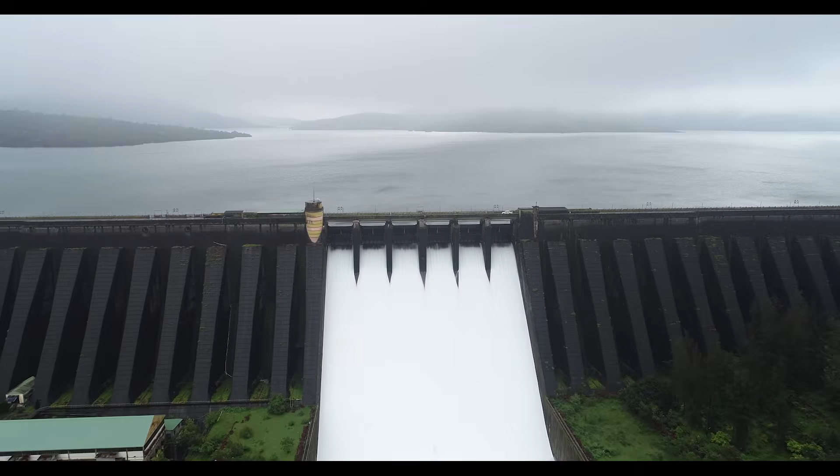The geographical character and features dominated by the Sahyadri ranges supported Chhatrapati Shivaji Maharaj in establishing Swarajya. In the midst of these Sahyadri ranges stands tall the Koyna Dam to fulfill its goal, keeping an example of the dominant character of the Sahyadri ranges.

Millions of years ago, the outpouring of hot lava gave birth to the sturdy, rigid and harsh mountain ranges of Sahyadri. These huge ranges also parent many rivers, mainly the 5 rivers Panchaganga, which originate at one place. The Panchaganga temple at Mahabaleshwar is the original source of the rivers Krishna, Savitri, Gayatri, Venna and Koyna.

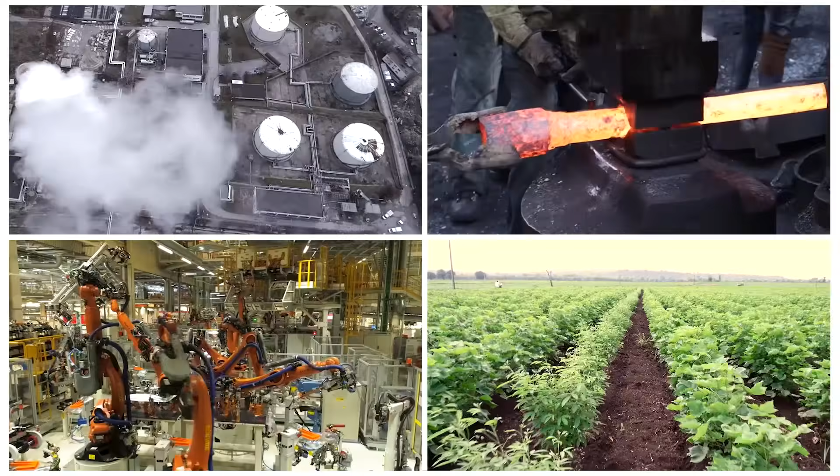The famous Koyna Dam and Koyna Hydroelectric Project is a man-built wonder on the Koyna River which flows through the Western Ghats. For more than 50 years, this man-built amazing structure has played an important role in the development and progress of every sector across the state.

Today, 1960 megawatts of electricity is generated through this project, which has emerged from the hard work and sacrifice of thousands of engineers. This project has also helped in the development of many industries and has illuminated many colonies. Also, many villages from the Sangli and Satara districts are receiving water supply for irrigation.

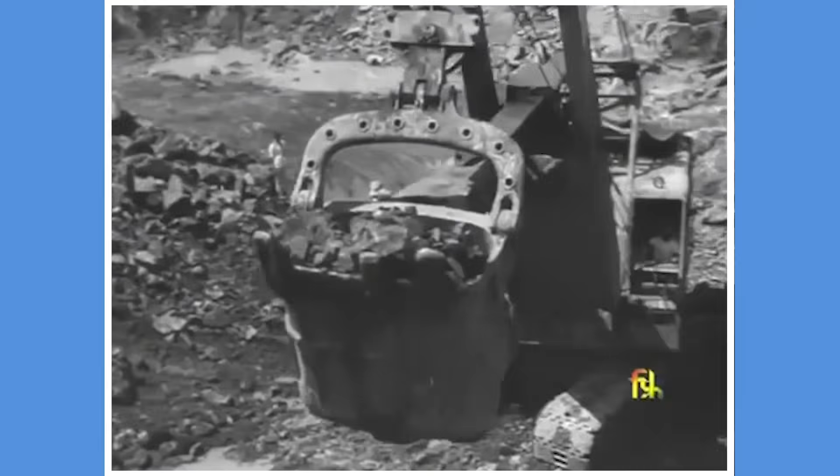But the journey behind the success story of the Koyna Hydroelectric Project was not smooth or easy. The year 1901-1902, the period was of British rule. Koyna River, which originates at Mahabaleshwar and flows through the terrain, was considered a concrete solution to the drought, since the rainfall in this region is 5,000 to 6,000 millimeters. 81% of the rainfall blends into the mainstream of the river. The entire valley is 2,000 to 3,000 feet deep.

Trampling on the difficult terrain of the Sahyadri ranges, the then British officer H.L. Bill, along with his colleagues, set out for the expedition which marked the first step towards the mammoth and unique task. After combing the region of Koyna and the Sahyadri ranges, an appropriate place was earmarked among the few villages for the dam. It was the Helwak village.

In 1909, a detailed report was submitted to the government of the then Mumbai province with an estimated cost of 81,92,000. Meanwhile, the industries in Mumbai were growing and so the demand for electricity too increased. In the meantime, Meares, an engineer, indicated the possibilities of hydropower generation on the Koyna River in the Hydroelectrical Possibilities in India survey. Meanwhile, some important developments took place.

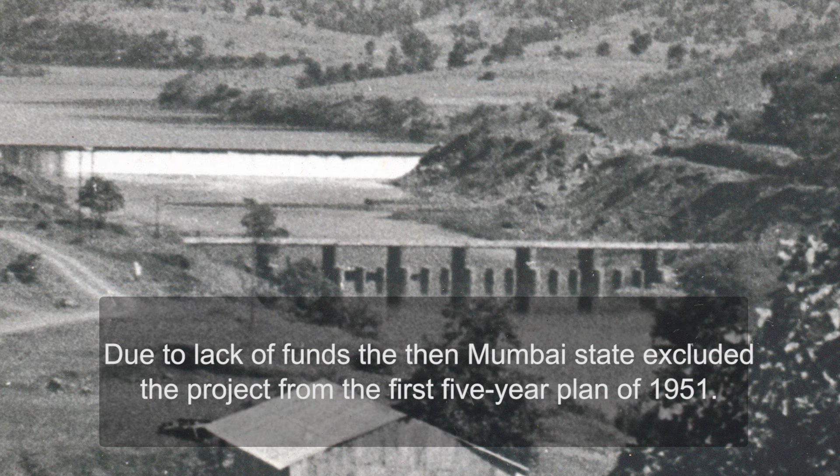The Deccan Manufacturers and Empire Association persistently followed and demanded the Koyna project. Due to lack of funds, the then Mumbai state excluded the project from the first 5-year plan of 1951. On March 16, 1952, the Deccan Manufacturers and Empire Association organized a conference at Helwak village. Along with Sant Gadge Maharaj, Bala Saheb Desai, C.D. Deshmukh, Karmavir Bhaurao Patil, Bhau Saheb Hire, Acharya Atre, Dr. Dhananjay Rao Gadgil and Kirloskar attended the conference.

Finally, on April 2, 1952, the delegation of the Helwak Conference travelled to Delhi for a meeting with Prime Minister Pandit Jawaharlal Nehru. The project was approved, and finally, on January 16, 1954, the then Chief Minister Morarji Desai inaugurated the project. After many surveys, meetings and reports, an appropriate Deshmukhwadi village site was earmarked for the dam.

But the project would also affect 30,300 villagers, including 101 villages, 3,755 houses and 77,500 acres of land. The government provided proper compensation to the affected and also helped them during the relocation and evacuation process. 101 villages were relocated into 5 districts.

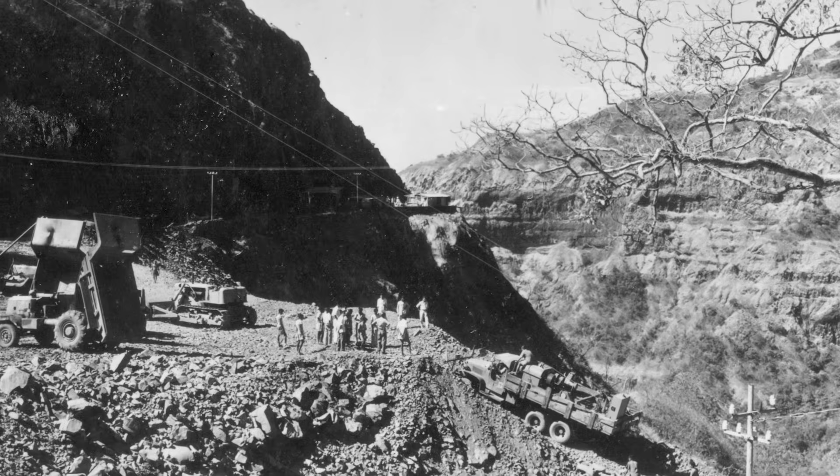According to the final report of the Planning Board, the Koyna project was planned to be carried out in 2 phases. In the first phase of construction, a target of storing 36.05 TMC water was planned at a height of 204 feet, while in the second phase, about 98.5 TMC water storage was planned by increasing the height up to 268 feet. M.L. Chafekar was appointed as chief engineer.

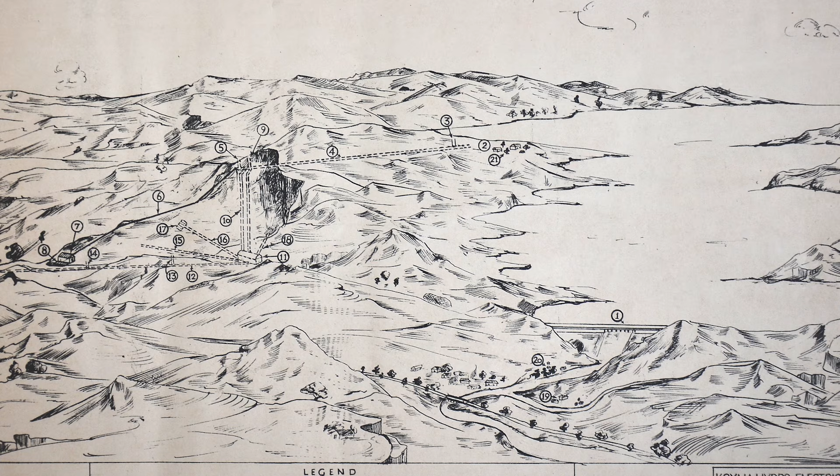Now the project was not just meant for irrigation, but the important task was also power generation. The engineers geared up. Dam and Design Circle and Tunnel and Design Circle were the 2 board offices created by Chafekar and team.

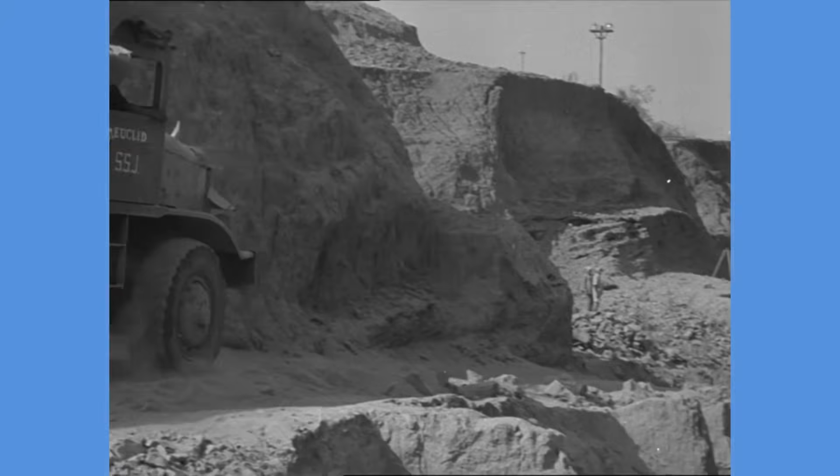The actual construction finally started on December 2, 1956. The workers and engineers immediately started working and were busy doing their jobs. Before monsoon, flow of the river was diverted by constructing a dam. The place of construction site too was dried up. The excavation was carried out on either sides of riverbed until they reached the hard rock.

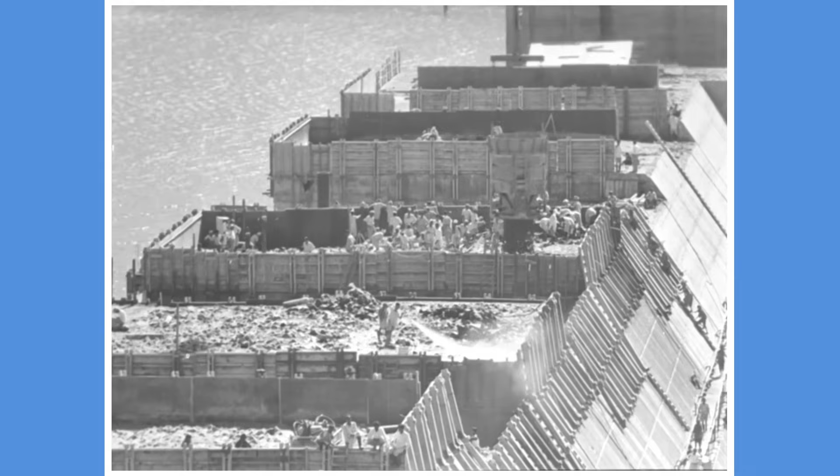The total construction of the Koyna's 53 monoliths were homogeneous type. The construction of 6 monoliths on both ends were in stone, while the rest were in rubble concrete. At that time, in Germany, 2 dams, Iker and Oker, were under construction in rubble concrete. Our engineers travelled to Germany to survey the dam.

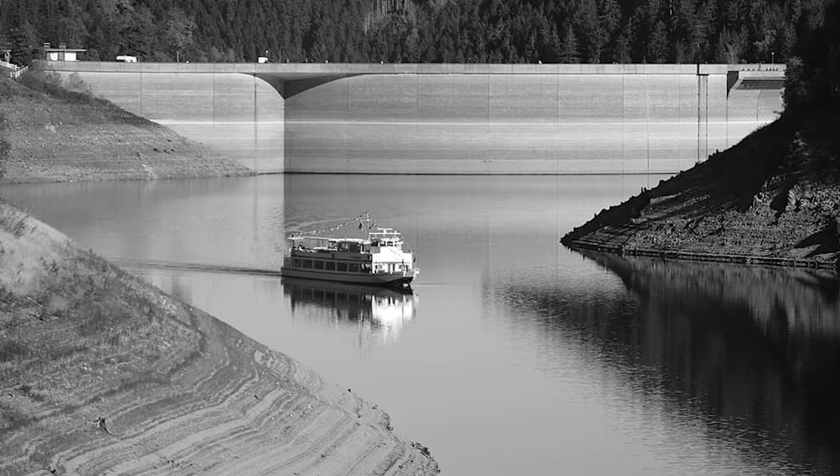Construction was progressing in a phased manner. The theme project that illuminated, brightened the state was actually taking shape due to the hard work of the engineers, thousands of workers, and support and sacrifice of the villagers. 2 long lane galleries were taking shape inside the walls of the dam. The construction of the dam begins in a planned manner. Nearly 900 feet long, 5 feet wide, and 7 feet in height, the gallery was taking shape.

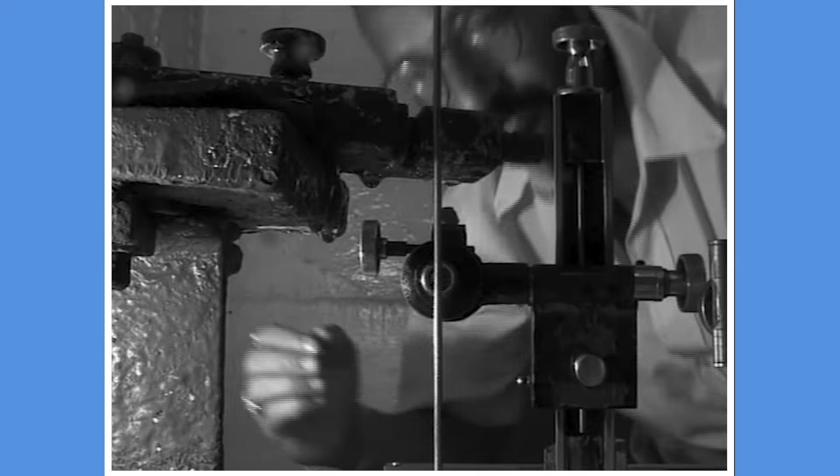Gallery is one of the most important parts. Measuring leakage, the pressure on the dam, checking the temperature of concrete are the important tasks done on a daily basis. The equipments like stress meter, thermometers, V-notch are kept in the gallery. A precise report and calculation of the water leakage from the dam is done on a daily basis in this gallery.

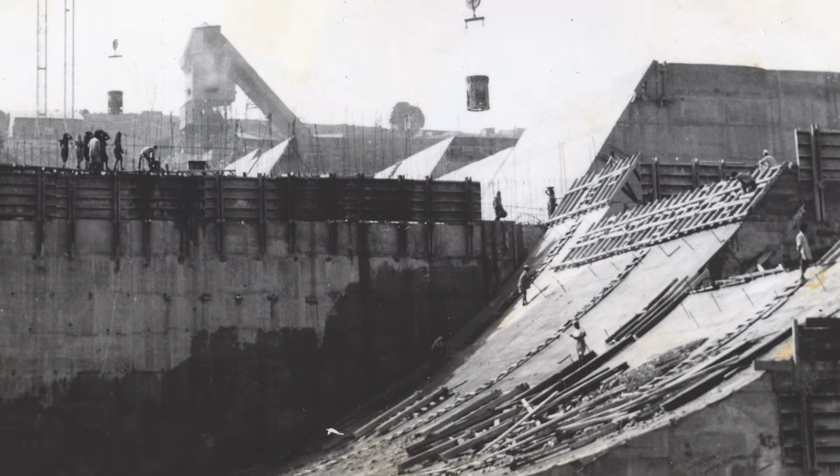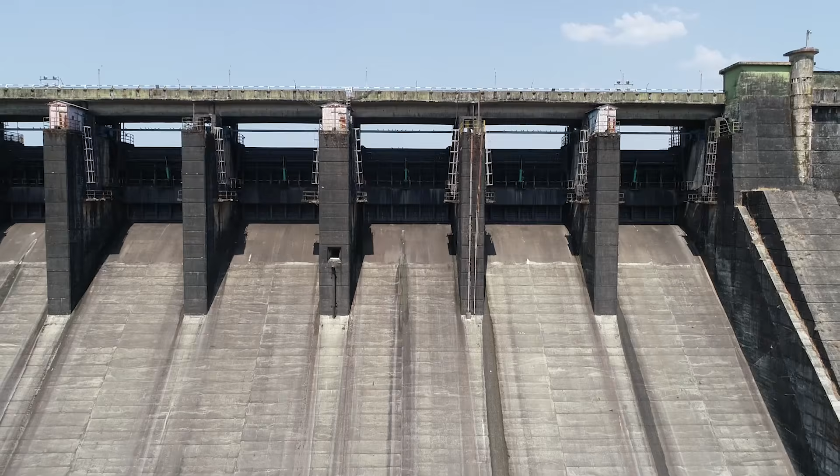On June 29, 1962, the first 2 phases of Koyna Dam were combined. Finally, by 1964, the construction of the dam was completed. The mechanical division of Koyna built the curved doors. While constructing the Koyna Dam, 2 penstock were made on the right side of the wall for future power stations. Further, in 1975, 2 generators of 20 megawatt capacity were installed there.

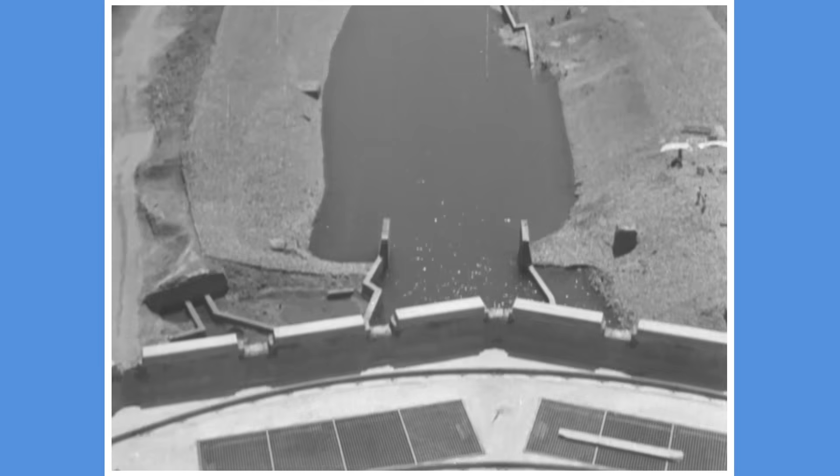While the dam was under construction, work on power station had started in Pophali village, situated directly on the steep slopes of Sahyadri, 9 kilometers on the western side of the dam near to the village known as Navaja. For same, an intake tower was being manufactured at Navaja. Use of the steep slope from Navaja to Pophali was going to be utilized for rotating the turbine and generating power, for which a tunnel of 3,700 meters was being dug. Ideal use of high Sahyadri ranges.

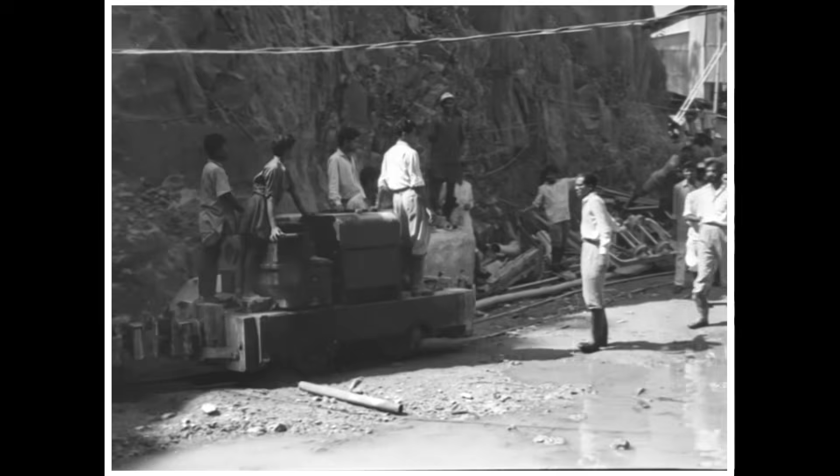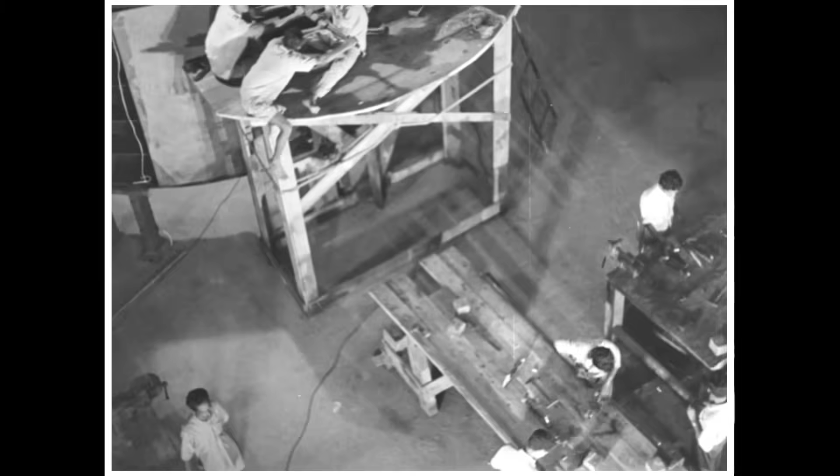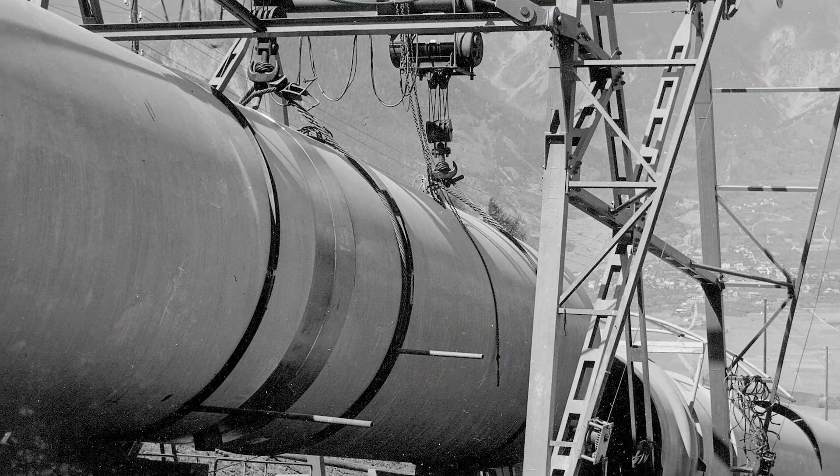Preparation for underground power station of Pophali was in full swing. Here, of 8 turbines, 4 on each side were being installed. This is known as Koyna Phase 1 and 2. A large tunnel was built to enter the underground power station, which was known as Approach Tunnel. Instead of penstock, the less expensive header tunnels were chosen for the underground channels in Koyna area. At that time, due to underground pressure shafts, Rs 1.80 crore were saved.

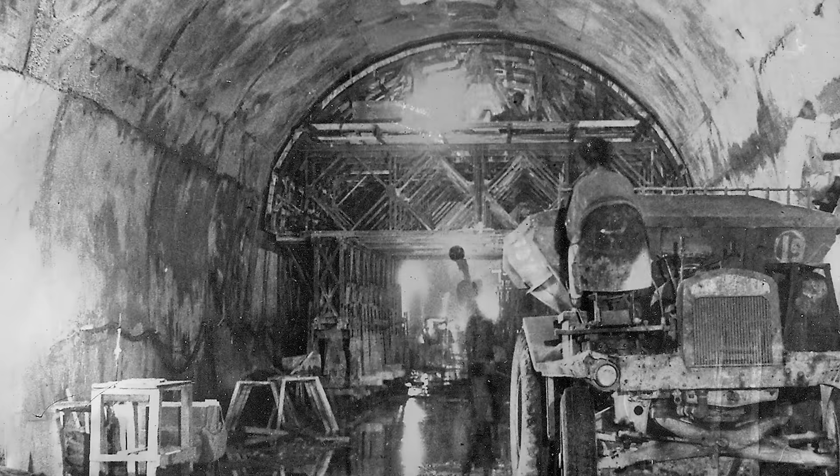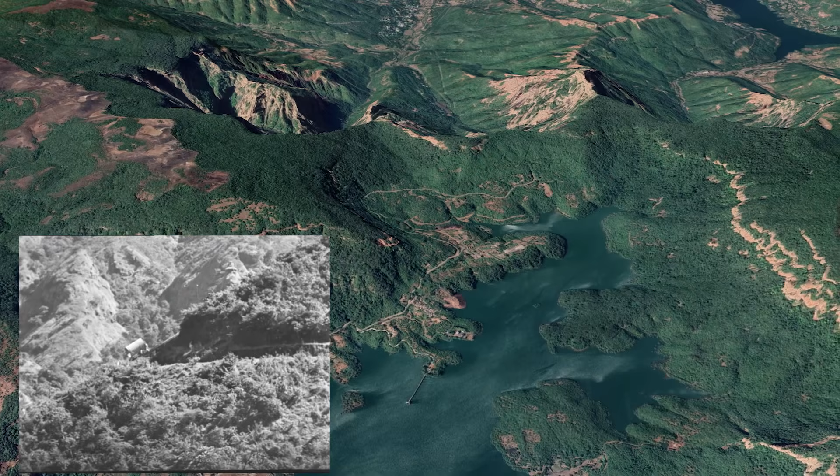The length of the head race tunnel was 3.748 kilometers and the diameter was 21 feet. The tunnel work was started from 2 places at the same time, one from the side of Navaja's intake channel and other from audit side. Head race tunnel was the only tunnel which was dug from both the ends at the same time. There was a small difference of 4 inches when 2 sides came together. A surge well was designed for the bouncing water when the turbine was shut or on. The work was carried out in difficult mountain ranges and in very remote area.

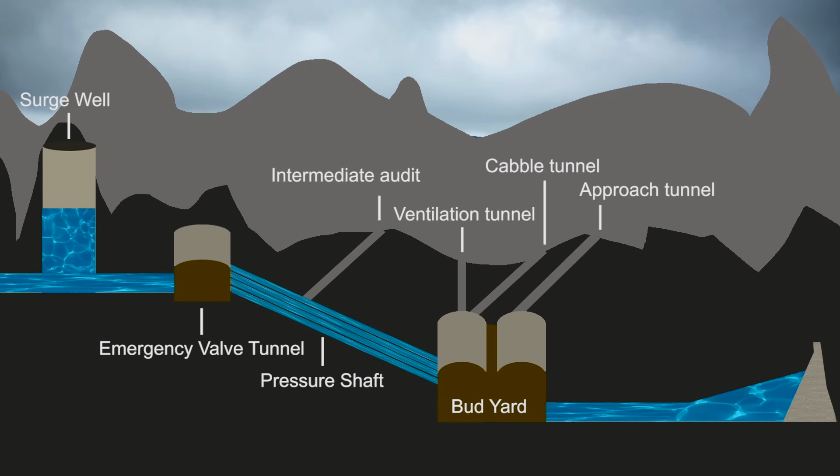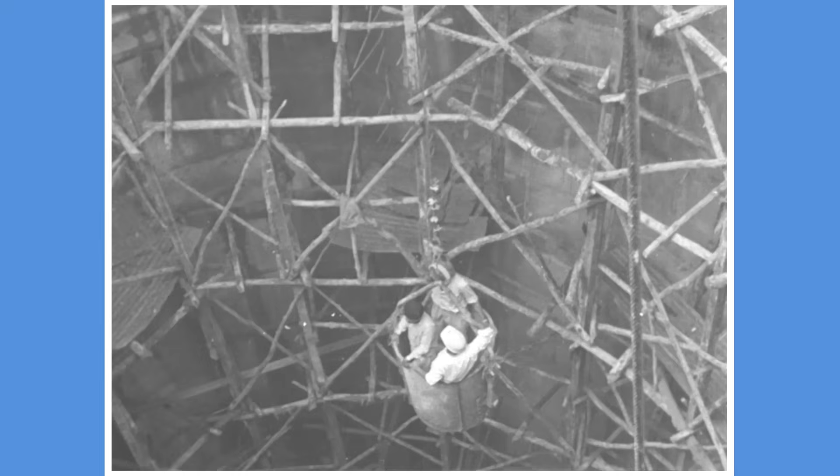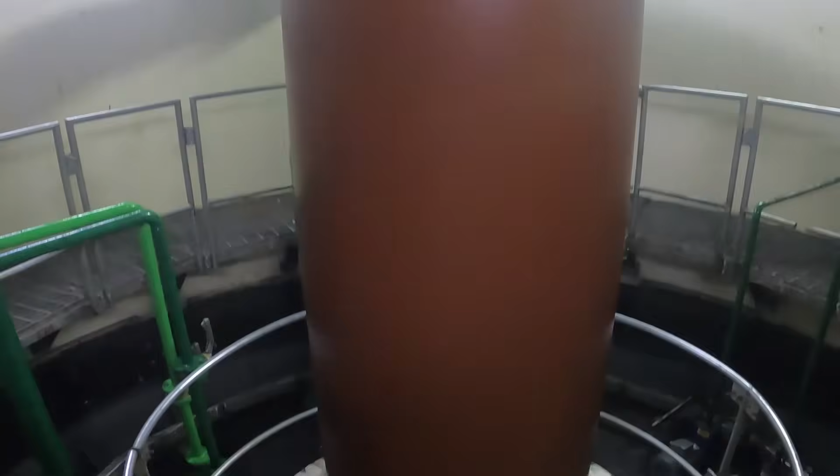A 10 feet diameter pressure shaft at a 45-degree angle and of 2,000 feet passes through a 12 feet diameter tunnel. From inside, steel pipes are attached to the pressure shaft. The engineers and workers worked day and night smashing the hard rock of Sahyadri. The most important place after this is the power station. One can experience the scientific invention in here.

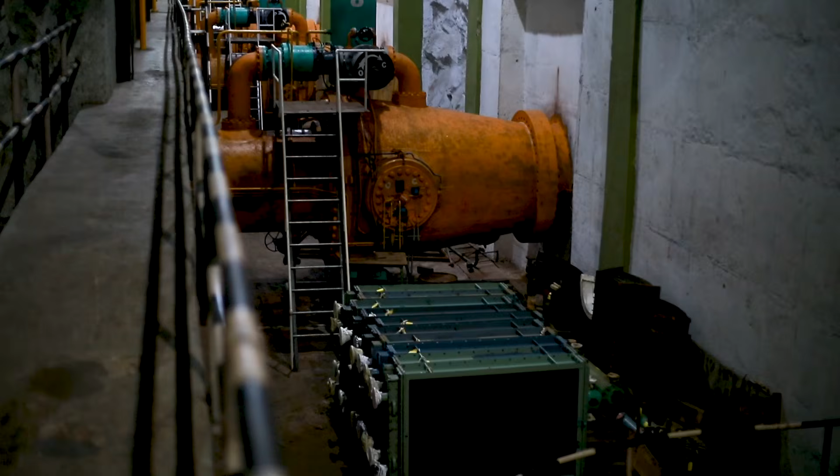Due to force of water, the fast revolving turbine for power generation; a water controlling spherical valve is here. How is electricity generated? Fast falling water speeds up the revolving motion of turbine blades. Turbine is connected to generator with the help of shaft.

Rotors attached to shafts have magnetic plates with electric currents. Structure of these plates is north-south. Sets of copper wires around the rotor. While moving in the middle of the stator, the poles of the rotor, which create magnetic field, impact the electrons in the copper wire of the stator to produce electricity.

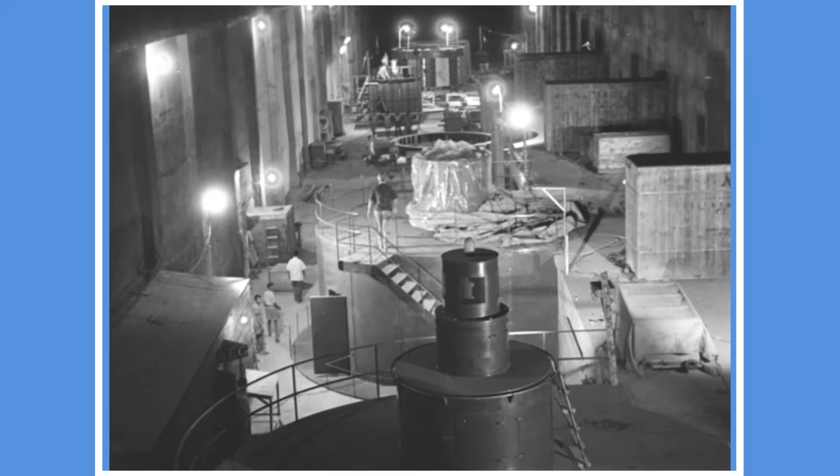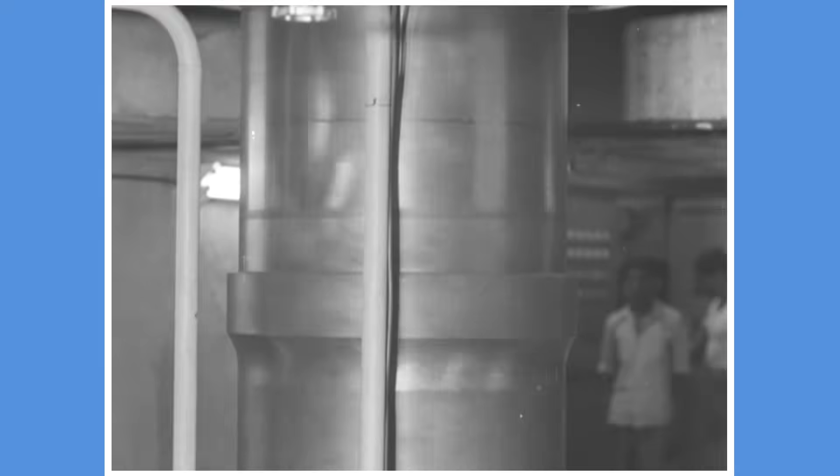A unique project was on the move to success with ingenuity, experimentation, and discovery of humans. Prime Minister Pandit Jawaharlal Nehru visited on April 10, 1960. On May 16, 1962, the first generator of Koyna was implemented by Honorable Chief Minister Yashwantrao Chavan. With both phases 1 and 2, total 560 megawatt of power was generated. With the help of Sahyadri and Koyna, the engineers' hard work took the first step towards illuminating the state.

With the ongoing project work, rehabilitation of the villagers was underway, as well as a colony for the project employees built at Koyna Nagar. While the state was getting illuminated due to Koyna project, the day of natural disaster appeared. In the early hours of December 11, 1967, a devastating earthquake of 6.7 Richter scale triggered at Koyna Nagar. The earthquake was so severe that the tremors were felt in North Indian and Southern Indian states as well.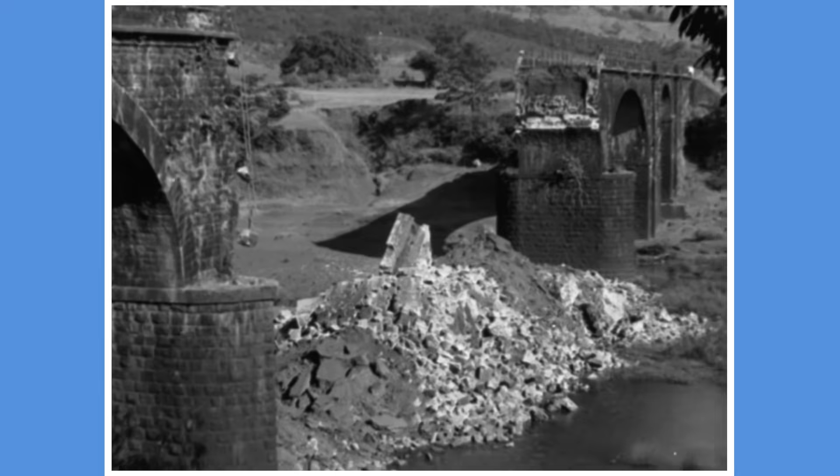More than 200 people died and more than 2,000 were injured in Koyna Nagar and the adjacent areas. About 10,000 houses in 40 villages were destroyed. The bridges like Helwak collapsed. The damage was innumerable. After the earthquake, the dam was still standing firmly, but the dam walls were horizontally cracked at isolated places.

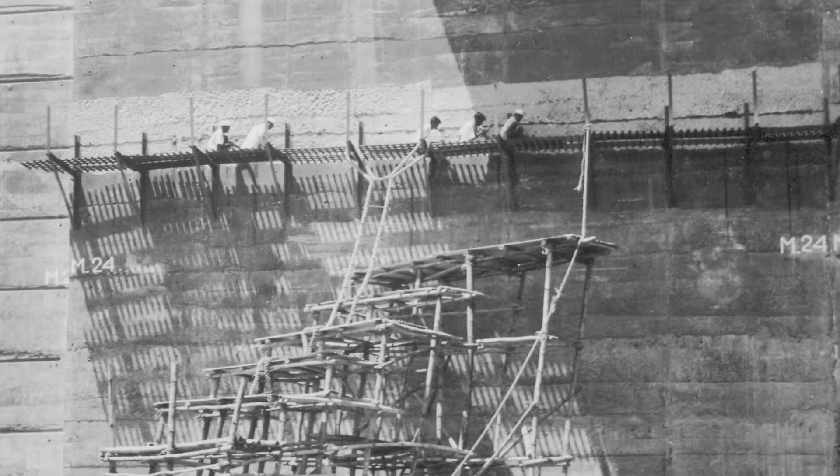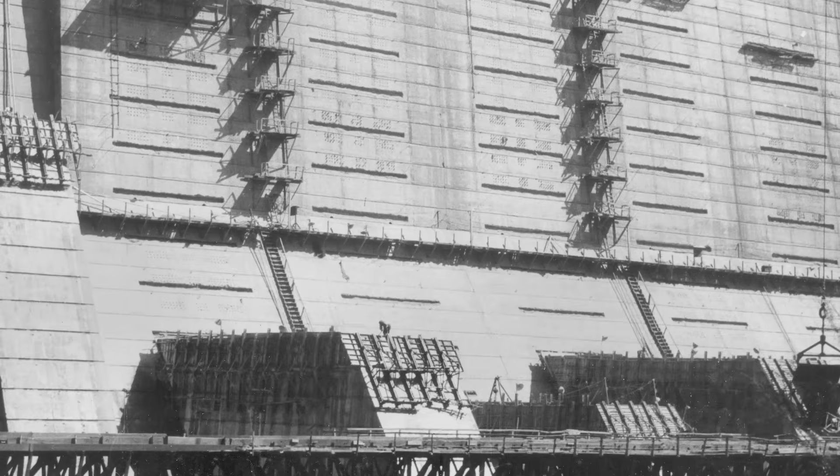The central government and UNESCO sent a team of experts to suggest immediate and permanent strengthening measures. Under the immediate solution, the cracks were repaired with epoxy resin and polyester, and grouting was done on both the sides. Under the permanent strengthening measures, it was decided to create a buttress design on the dam to strengthen it after the earthquake. Closure concrete was used to integrate old and new construction.

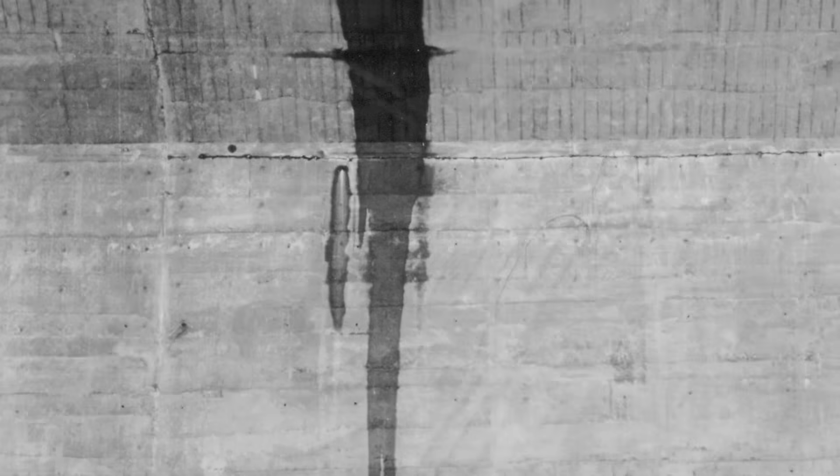At the same time, the number of cracks was found to be high at the site where the upper part of the dam was modified while completing 2 phases of the dam in a row. Therefore, the top and bottom were connected with the help of cable. Holes were drilled from the top, cables were inserted and concrete was filled. It was said that it looked as if the engineers had stitched the dam. Due to the repairs and strengthening, Koyna Dam has become a strong dam. Every year, the dam is a boon for sustainable irrigation and power generation.

In March 1966, all the 8 machines of Phase 1 and 2 were operationalized and handed over to the Electricity Board. However, the water released from the Pophali site after power generation into Vashishti River is 133.20 meters above sea level, a golden opportunity to use the water again for power generation. That is why it was planned to dig a 4.5-kilometer tunnel to stream the water released from Pophali into the basin of Vaitarani River, construct Kolkewadi Dam to store it, and build a power station at Alore to generate electricity.

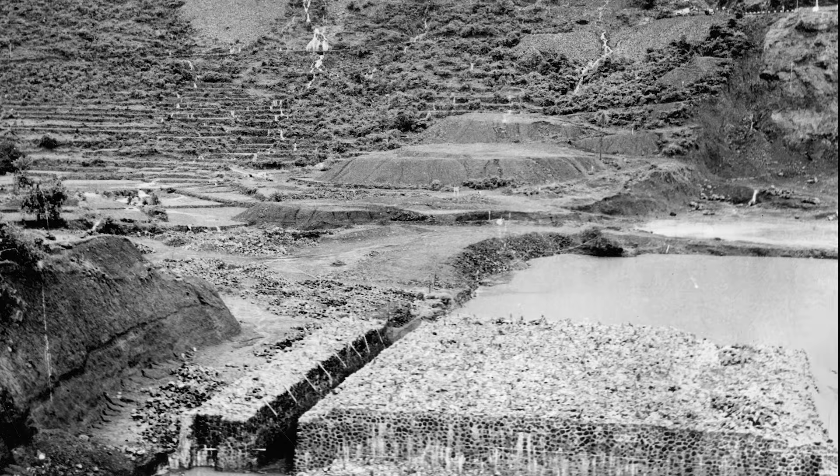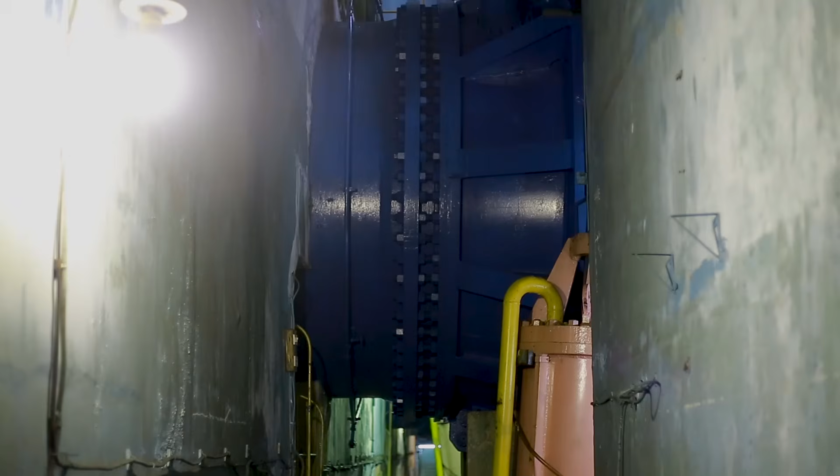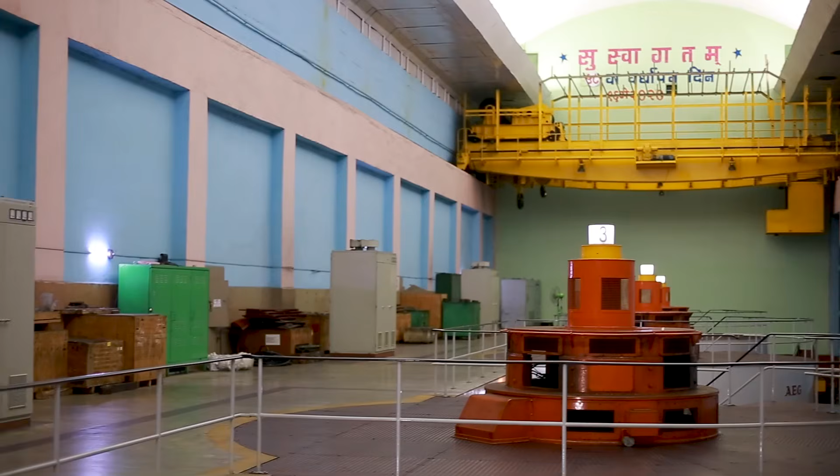The fourth phase of the planning was to make adequate use of water in the reservoir and convert the entire Koyna hydropower project from base loading station to peaking station, even though electricity was being generated from Phase 1, 2 and 3. Near Navja, where there was an intake tower of Phase 1 and 2, a plan was proposed to construct an underground power station of 1000 megawatt capacity from the water which directly flows to Alore through another tunnel. In 1985-86, a World Bank team visited the project site for the survey and checked the loan report submitted, while in 1989 it sanctioned a loan of 40 crore US dollars for this project.

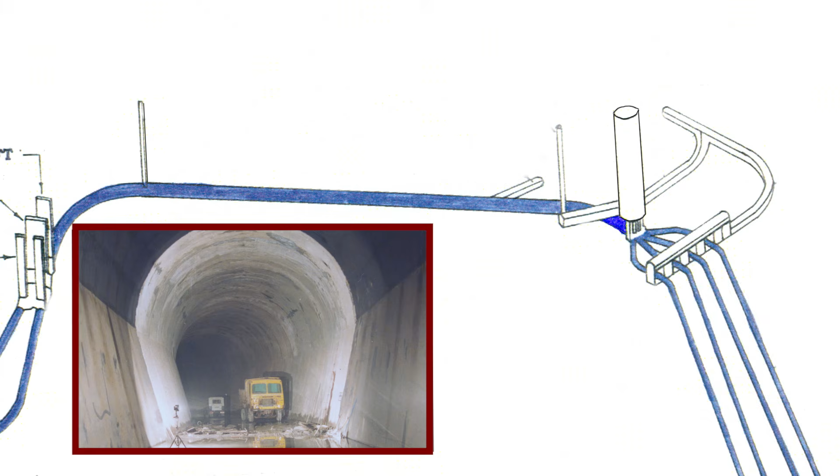Building the intake in the fourth phase was a challenge as there was water stock in the dam. For this, it was decided to use the technique of lake tapping, which was frequently used in Norway, with the help of their experts. A lot of work was to be done before lake tapping. It was not an easy task to be done on the huge and hard rocks of Sahyadri ranges. The head race tunnel, surge well, emergency valve tunnel, and pressure shaft were very complex. Work from Navja to the surge well and from the surge well to Alore's underground power station tunnel had begun.

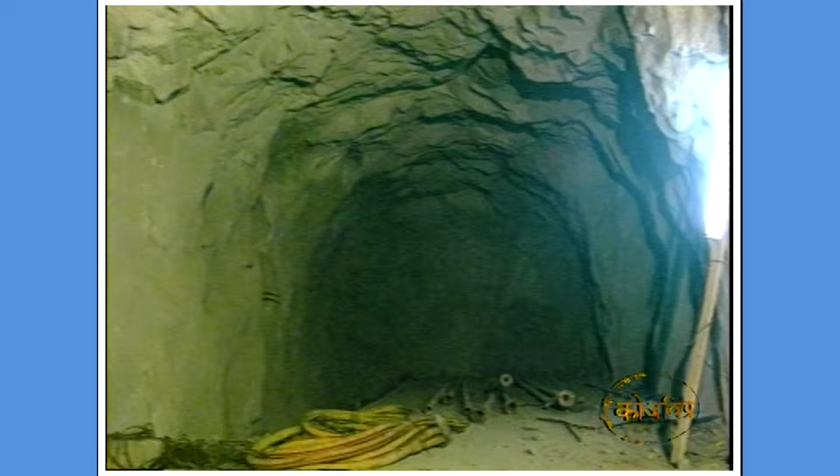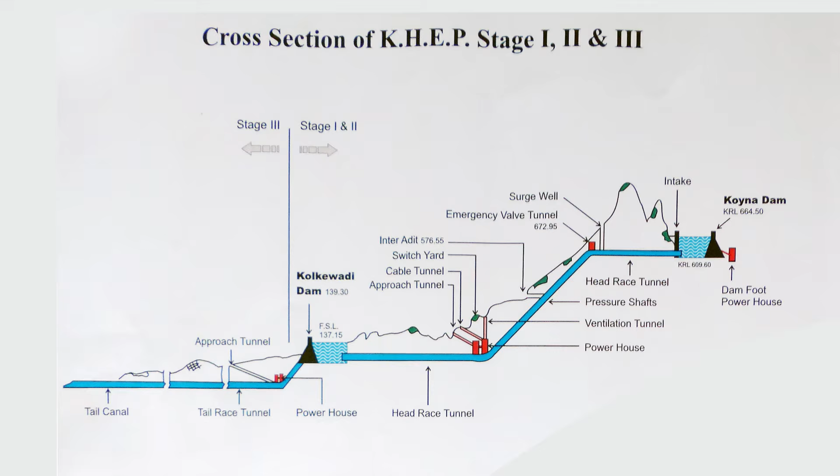The aim was to install 4 generators of 250 megawatt capacity. Although the fourth stage on paper was similar to the second stage, in reality there were endless difficulties. Surveying these hard and harsh mountains of Sahyadri was a challenge. Occasionally, the workers completed the work by tying ropes. Blasting was done by piercing cavities and filling them with explosives. Several safety measures were taken care of.

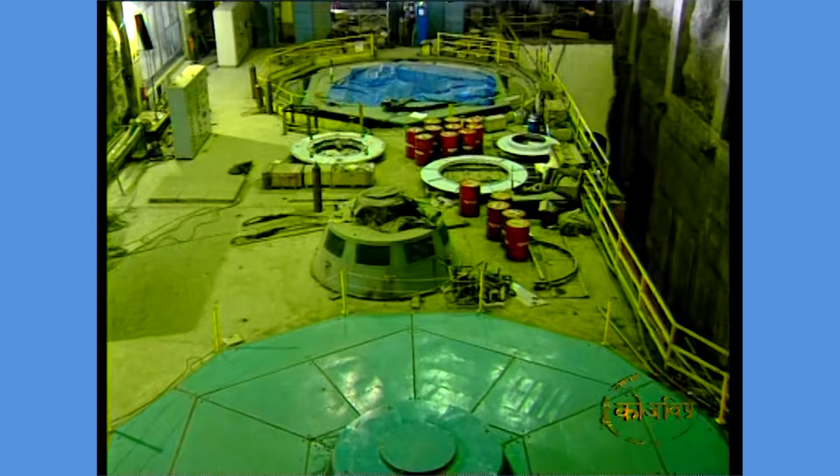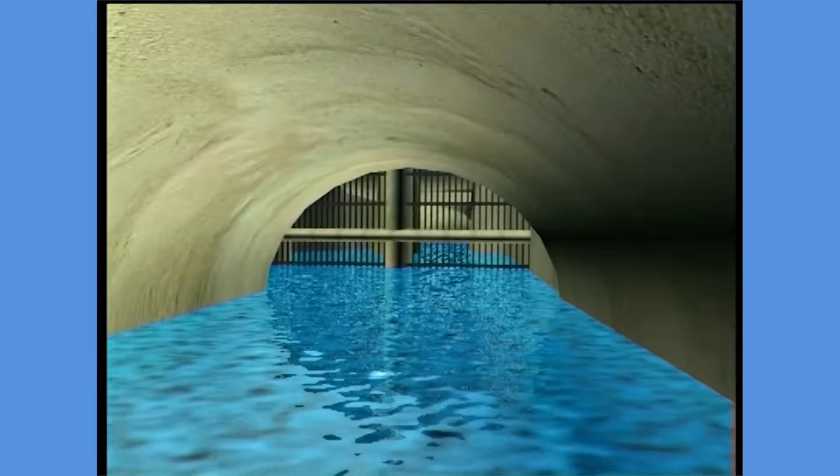As in the third phase, a Francis turbine was also used in the fourth phase. Key factors and aspects of phase 4: 4 machines manufacturing 250 megawatt. HRT from the site of lake tapping to intake tunnel. Cement concrete lining of tunnel. Length of head race tunnel 4.22 kilometers.

Diameter of surge well 69 feet while height 430 meters. Design of pressure shaft at 58-degree angle on the ground. 4 pressure shafts of 590 meters. Work starts in full swing in the turbine hall. Thousands of labor and engineers were working day and night to install various machinery.

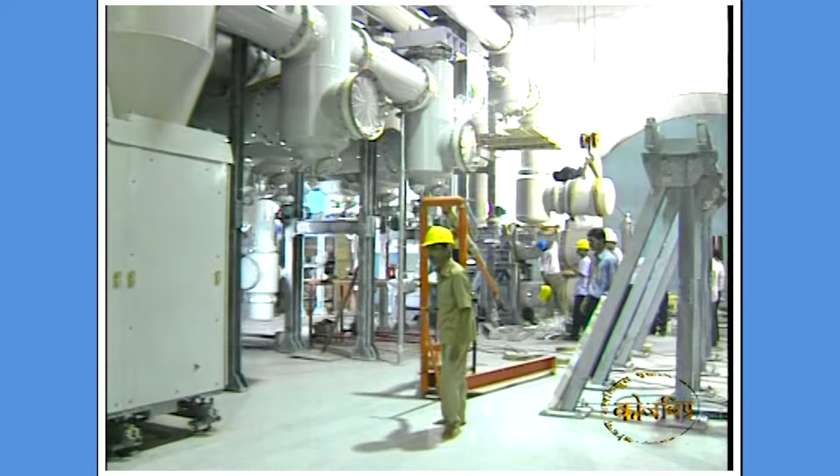In the fourth phase, there was no space to build a switchyard. So the country's first gas-insulated switchyard was erected by using modern technology of SF6 gas in the transformer hall of the power station. If the switchyard was installed outside, many acres of land would have gone under the yard. But the new technology switchyard solved many problems.

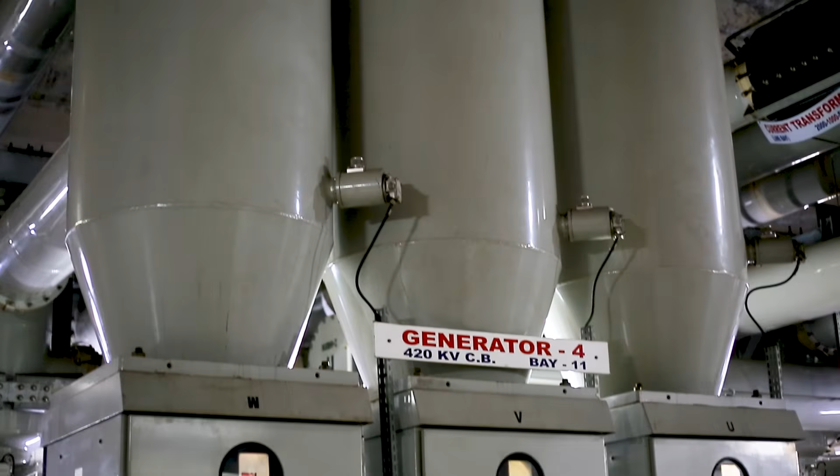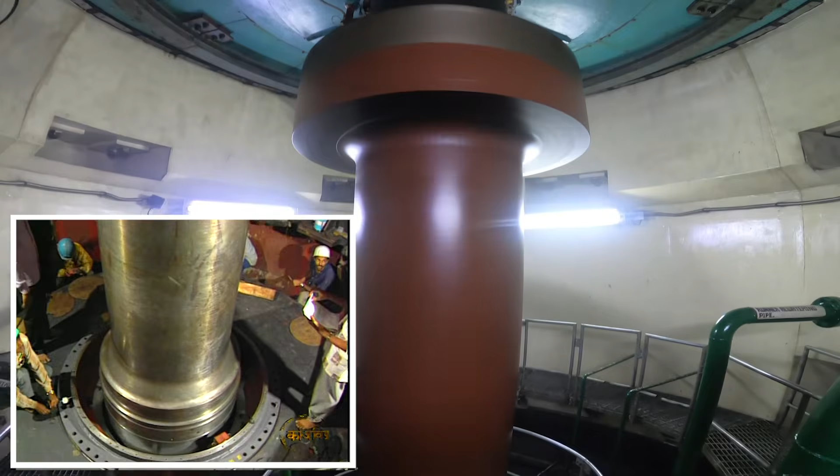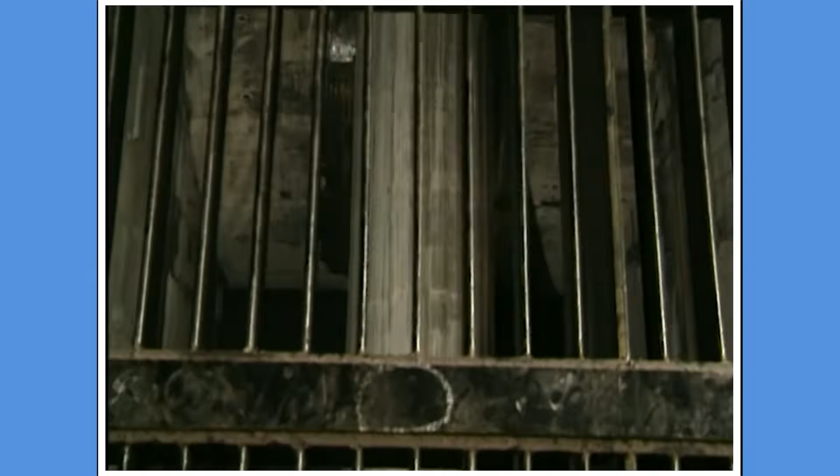The work of the power station with 2 intake tunnels was almost complete. This amazing project was taking shape with major components like the main power station. Now the preparation for lake tapping was in the final stages. The work on the tunnel under Lake Tap, the intake tunnel, was completed in 1997. Now to break the 6-meter rock, the tunnel below the reservoir was filled with explosives by piercing holes.

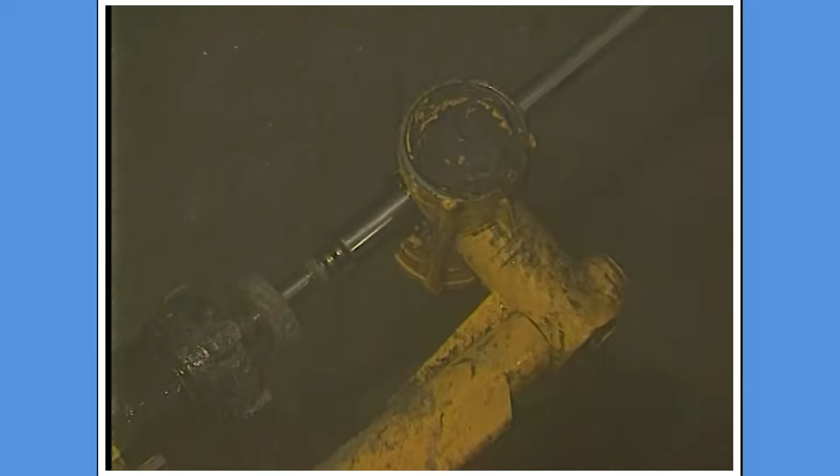Experts from Norway were deliberately called in. The possibility of some unexpected events while drilling holes in a rock under tremendous water pressure could not be ruled out, but it was a test of the engineers' courage, study, and decision taken after hard work and research.

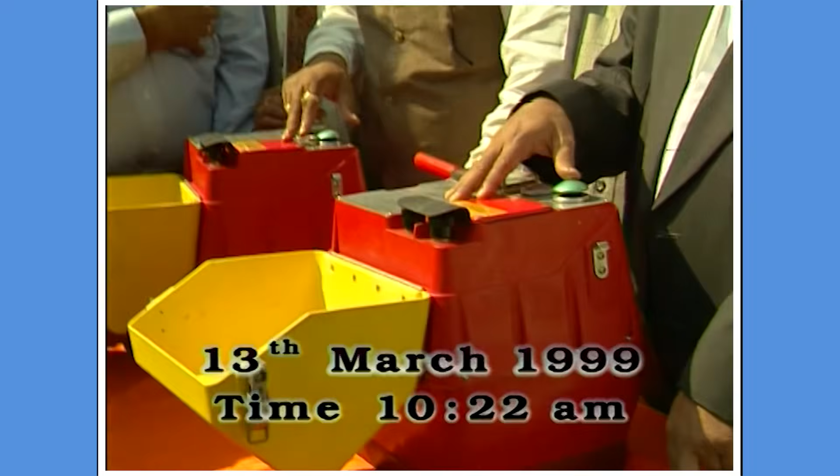Finally, on March 13, 1999, in the presence of the then Chief Minister Narayan Rane and Deputy Chief Minister Gopinath Munde, Asia's first lake tapping was successfully carried out. As the key was pressed, the world saw the gushing water flow. The atmosphere was filled with joy, pride, and happiness. Each and every person present had a smile of pride. The engineers, countless workers and laborers were satisfied and proud of their hard work. Today, 1,000 megawatt of power is being generated from the 4th phase.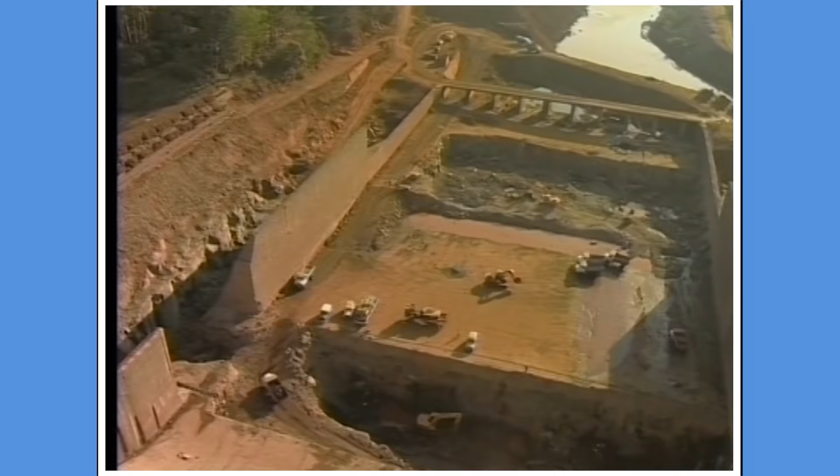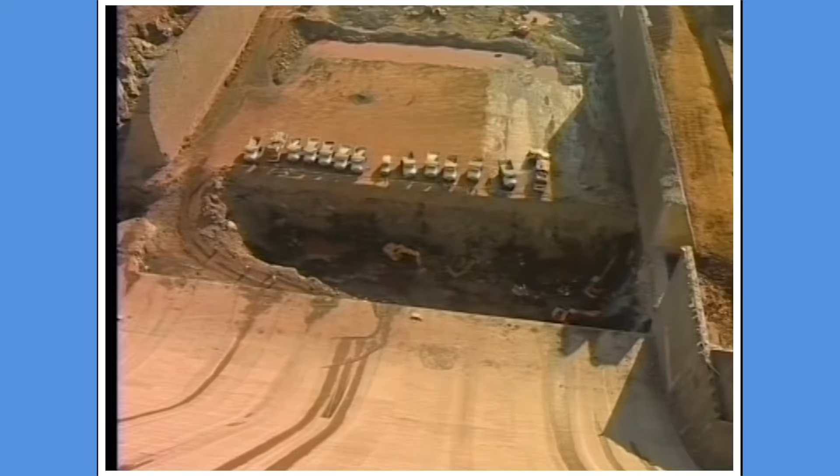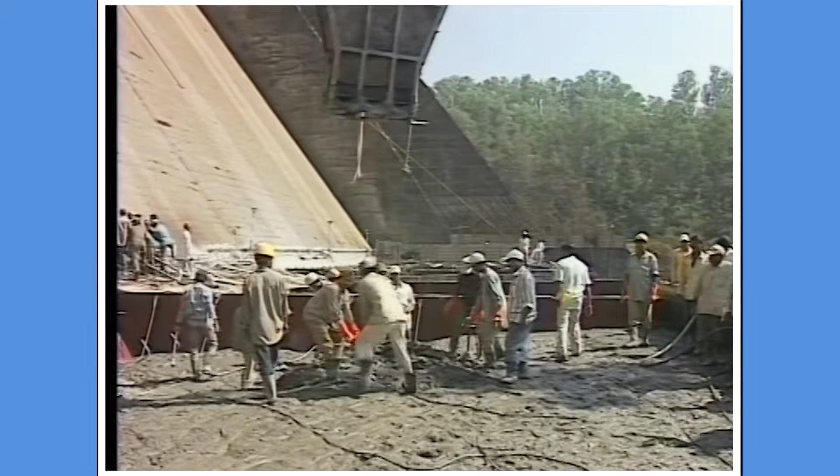In the first phase of strengthening, the foundation of the sewer was to be dug 25 meters wide, 25 meters deep, and 82 meters long. The rock was to be broken without endangering the construction of the dam. The rock was smashed by very controlled explosions. The length of the stilling basin was increased by 52 meters to 115 meters. During this process, to control the temperature of the concrete, actual ice was used, for which an ice factory was set up at the site.

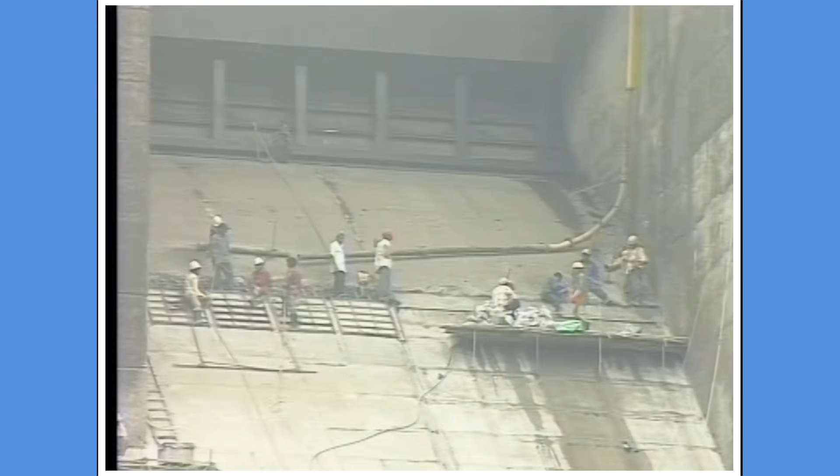It was a threat to life while working on the strengthening of the sewers in the second phase. The work was completed in a very dangerous situation. The difficult task was done in a phased manner by constructing a temporary raft. To strengthen the concrete, as well as to integrate the old and new concrete work of the sewers, it was filled up with closure concrete. Soon after the work was completed in May 2006, during the rainy season the dam was full, and the water released at a speed of 1 lakh cusecs acknowledged strong and quality work.

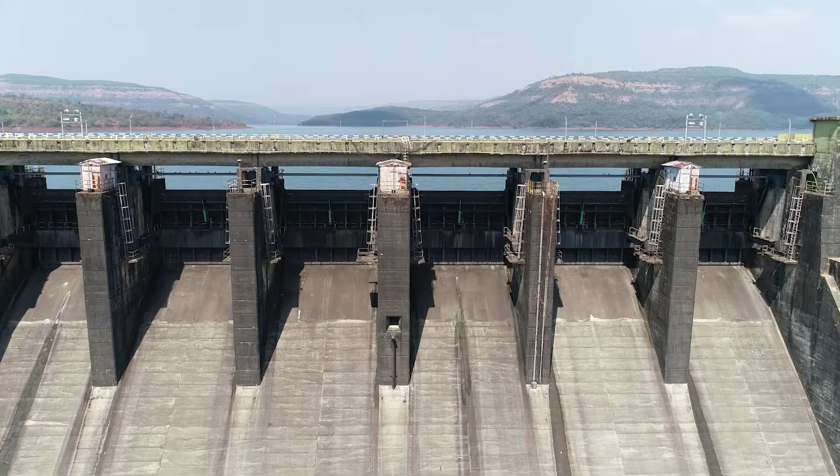Why was the fourth phase expansion necessary? Krishna Valley Development Board was established in 1995 for Krishna River water distribution, to increase the area of irrigation by using available water immediately. For new irrigation schemes, 50 TMC instead of 30 TMC water from the Koyna was provided to the drought areas where schemes were launched by Krishna Valley Corporation in Mhaisal and Tembhu. Accordingly, 5-feet valve or flap gates were installed at the dam gates. 105 TMC instead of 98 TMC water was stored after the strengthening in 2006.

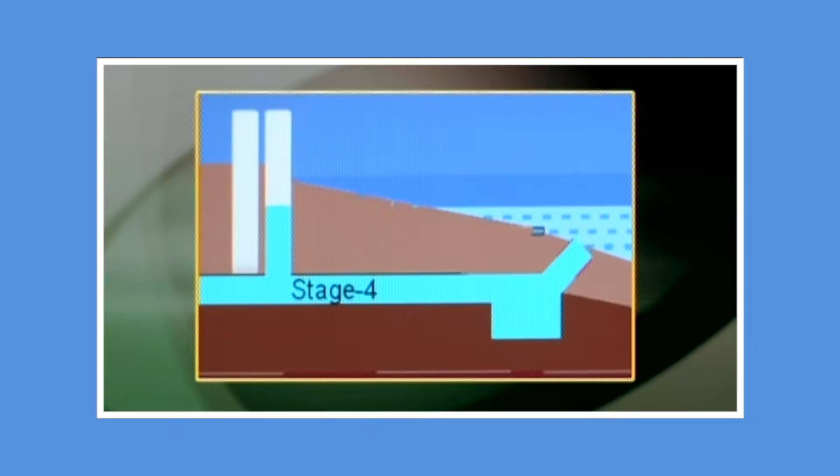Nevertheless, if water was released for irrigation, the water level of the dam would have decreased in summer, and the water level required at the lake tap site and above the intake tunnel would have been reduced by 12 to 13 meters, which was a threat to the turbine, as well as the possibility of power generation from Koyna plant being stopped. So the only option was to go to 618 meters deep for one more lake tapping to keep the power generation intact in the summer.

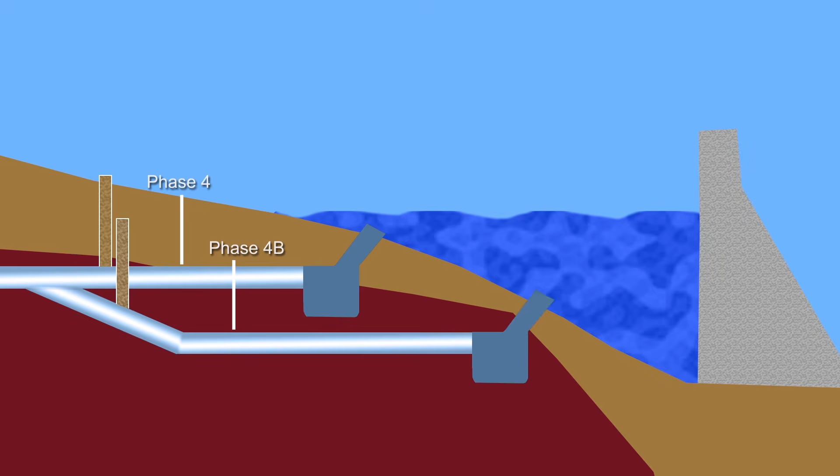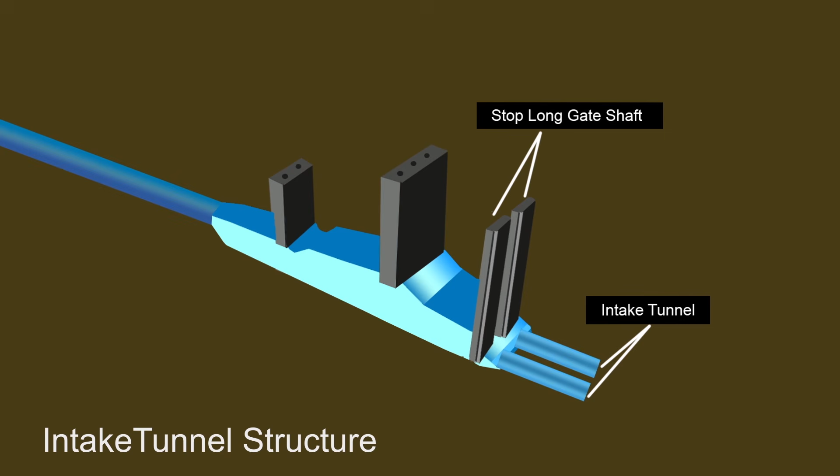The focus was to connect the Phase 4 old HRT to extended HRT. A survey was followed by a plan of lake tapping, and the work started in 2001. The work on 4.5 kilometer long head race tunnel started: 2 intake tunnels, stop log gate shaft, trash rack shaft, service gate shaft. Engineers faced the challenge of connecting the extended HRT to old HRT.

For this work, the power generation of 4th stage would have to be stopped for 200 days. The electricity board refused, and so the work stalled a little. However, after renewed efforts in 2010, work resumed after the electricity board closed the 4th phase for the required period.

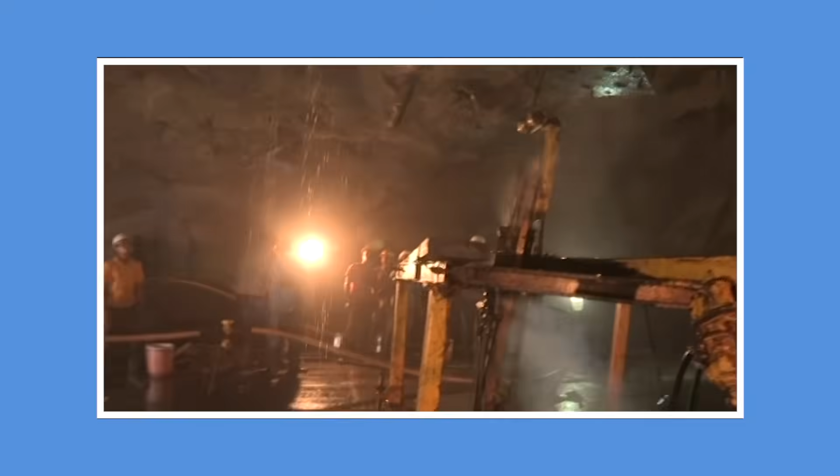The work started on July 16th and was completed on October 31st, 2010. The second lake tap was designed just like the first lake tap. The second lake tap was successfully inaugurated by the then Chief Minister Prithviraj Chavan and Deputy Chief Minister Ajit Pawar on April 25, 2012.

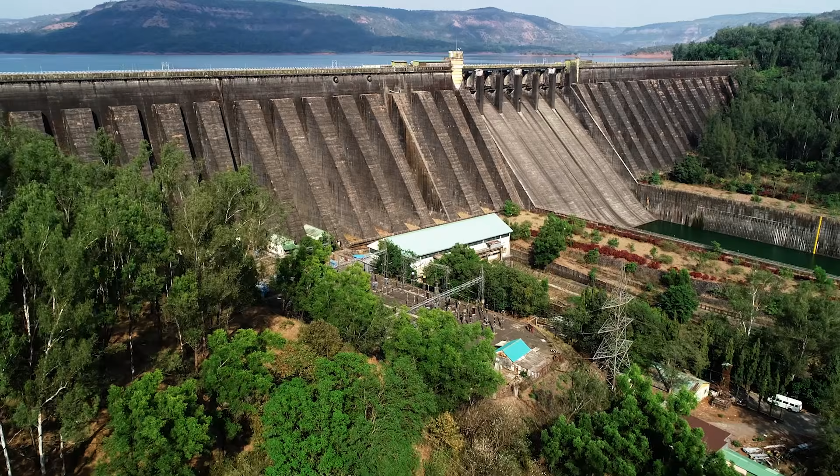Today, 1960 megawatts of power is being generated through Phase 1 to Phase 4 and the extension through Koyna Dam. At present, power is being generated from the power station, which is at the right side of the dam wall. Similarly, work is underway on tunnels for power generation by streaming water through tunnels on the left. Soon, it will start generating power. At the same time, Phase 5 is proposed at Humbarli Nala, Ozherde waterfall.

Today, Koyna Dam is not only a major power generating hub in hydro project type, but also a tourist destination. This beautiful area is of special importance. Ozherde Falls is a tourist attraction like Koyna Dam. Thousands of tourists visit here every year to see the Ozherde Falls.

Koyna Sanctuary is well known. This sanctuary has played an important role in the Sahyadri Tiger Project. The lush green dense bushes around Shivasagar, named after Chhatrapati Shivaji Maharaj, beckon tourists and mountaineers. Spread on 426 square kilometers of forest, it got sanctuary status in 1985. Mountaineers are very much interested in places like Vasota, Chakdev, Nageshwar. Tigers, leopards, bears, deer, various types of other animals, birds, reptiles are the wealth of this sanctuary.

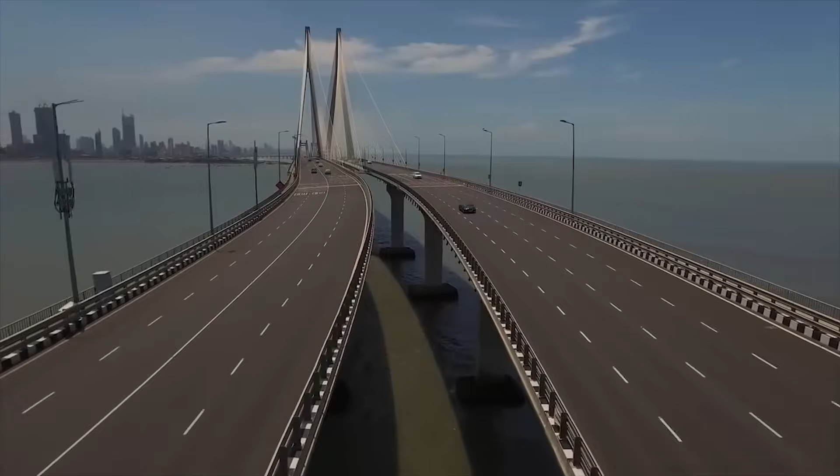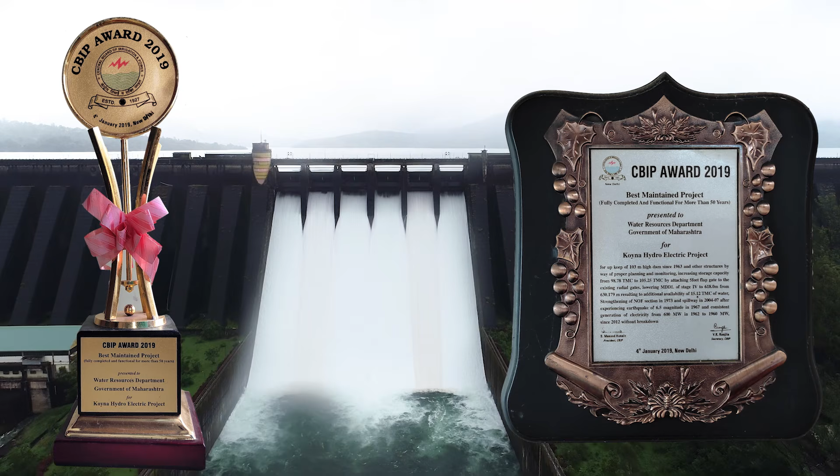After independence, the country made significant progress in many fields, from ISRO's space missions to manufacturing industries and medical education sectors. But the essential thing for the progress of all these sectors is electricity. Before power generation started from non-conventional sources, projects like Koyna gave Maharashtra a big hand in the emerging times. The central government has recognized the outstanding performance of good management, monitoring, storage capacity addition, strengthening and uninterrupted services run by Koyna Department for more than 50 years. The project was awarded the CBIP award by the government in 2019.

With proper planning of the government, the relentless efforts of the engineers, employees, workers, as well as thousands of known and unknown hardworking families who have given up land for the dam, the electricity of Koyna is still flowing in the form of Lakshmi, in the houses, in industries and various businesses, taking a key role in the progress of the state, and therefore the Koyna project is called the Lifeline of Maharashtra. Through Koyna Dam, this energy of light will continue and will increase.